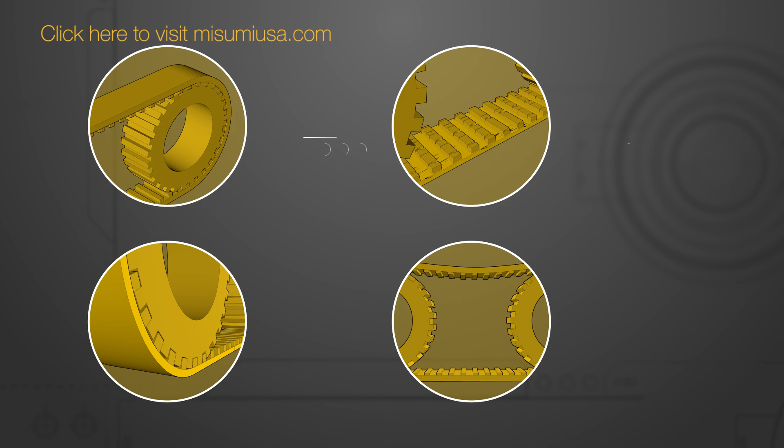So far in our Mech Minutes Timing Belts and Pulley series, you've learned how to identify the appropriate belt for your application and the basics of setup, including tensioning, alignment, and typical wear signs. If you missed out on any of the previous episodes, feel free to hit pause and go back to get caught up. In this episode, we'll take a look at types of mounting for pulleys and the main uses of each one.

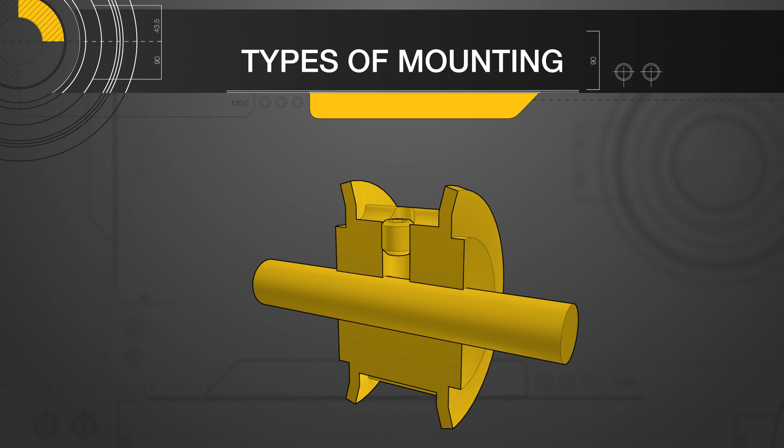Beginning with the most inexpensive options, good for fitting into tight budget scenarios where the load is not a big constraint, set screws provide security for only the lowest loads. These use friction of the set screw against the set screw flat on the shaft for their holding power. With the addition of a keyway, they can provide a mounting solution for low and medium loads while still maintaining low cost. Often when installing, the timing or orientation of the pulley cannot be adjusted freely since the set screw fits to a set screw flat and a keyway and key fit in only one orientation.

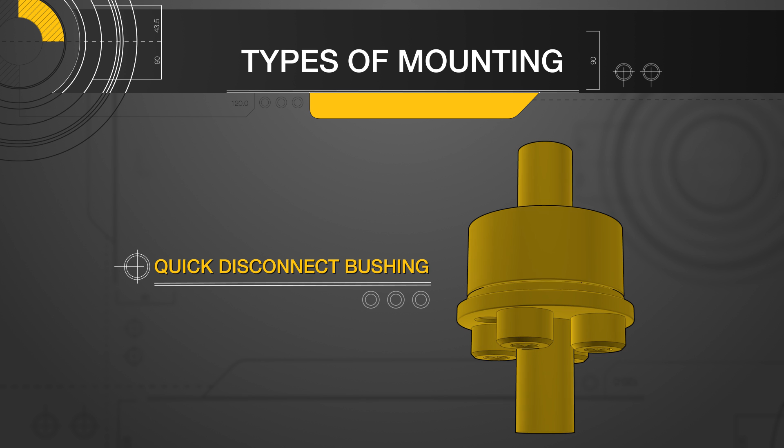Offering some clamping force with the ability to make more fine-tuned adjustments to the timing of the pulley, a split hub also offers a relatively low-cost solution for medium loads as well. Quick disconnect, or QD bushings, an older technology used primarily on HTD high-load applications, tighten on a shaft and allow the user to mount from either side of the sprocket.

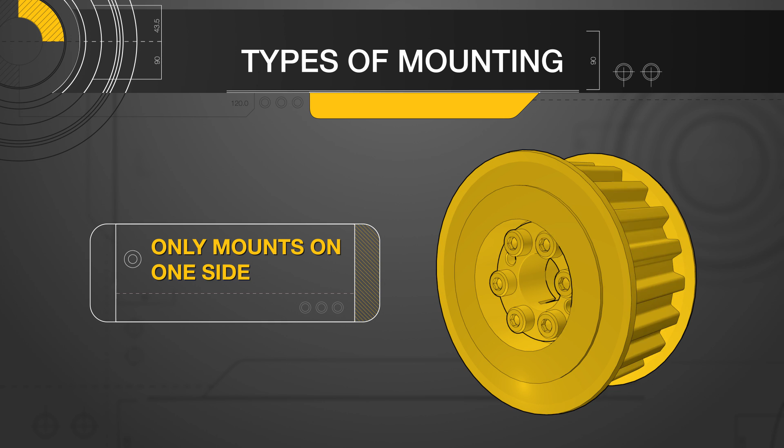Finally, for the highest load applications, the taper lock, also known as the keyless bushing, is very flexible for design, giving users options to mix both imperial and metric bore sizes. This unit, while very popular, does have some drawbacks, namely that it can only mount from one side, thus limiting its effective in-application utility. Determining the best mounting method for the pulleys in your application shouldn't be difficult.

In fact, it may be the easiest part of fitting a timing belt and pulley system into your machine. If you've gone through the entire Mech Minutes Timing Belts and Pulley series and still aren't sure if they can provide a solution to your automation issue, come back for our next video, which will highlight some of the common applications for timing belts and pulleys.